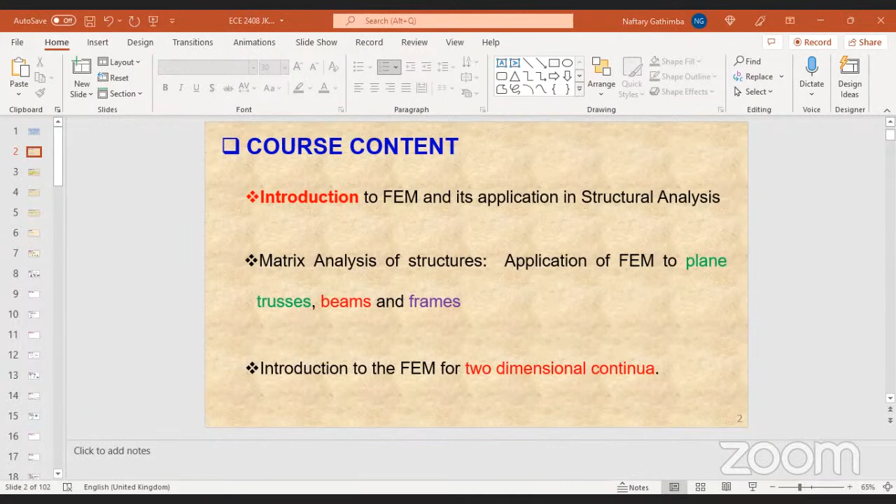All right. So this is the content of our course for today. And that being said, let me just go off the video. I was told last time that sometimes it hides some content, so we always continue improving. So allow me to just go off the video, and then I can make this full screen so that you can see clearly. Okay. So this is the content. Okay, sorry for that. Yeah, this is the content of our course.

So we're just going to have a short introduction to FEM, and this is theory. I like people understanding the theoretical part. Even if usually in structures the question will be calculations, we need people also to understand why we're doing this, what this is, right? So we are going to have a short introduction to finite element methods and how it's applied in structural analysis. Then we are going to go to calculations proper in matrix analysis of structures, where we are going to see application of this method in analyzing plane trusses.

We always start with a truss. I know you have heard trusses so many times, because a truss is a very simple structure for practice, for hand calculations. Usually when you start going to beams and frames, especially frames, you find manual calculation may become an uphill task. So usually, not always, you find many books, many texts, many lectures in analysis use a truss as an example for demonstration purposes.

Then, once we see the plane trusses, a kind of 1D structural element, we are going to see two-dimensional continua, and then go to solid elements, 3D. So we start with 1D, 2D, then 3D elements.

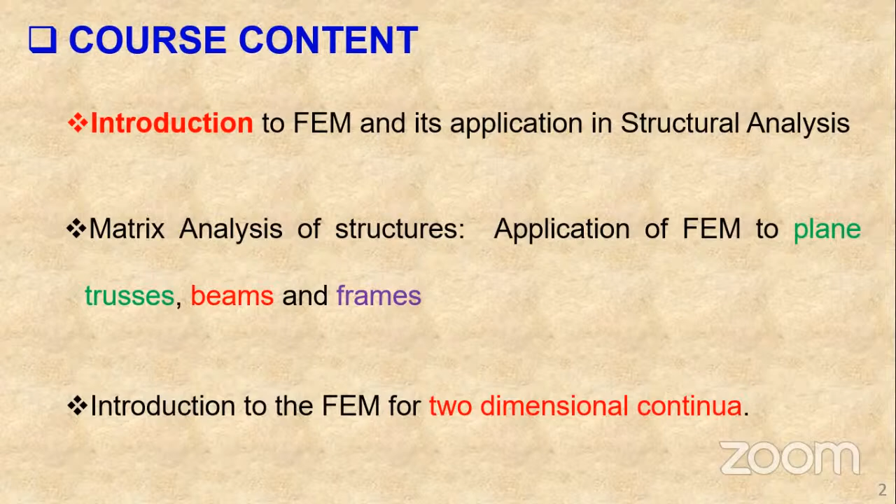So what is expected of you from this course? At the end of this course, you should be able to follow the standard procedures of the finite element method. The beauty about this method is that there are standard procedures. Even if the problem is humongous, a big structure like a multi-story building, the procedures are there. So the same procedures you follow for a simple structure are the same procedures you follow for that mega structure you're going to analyze using this method.

You should also be able to apply the finite element method to analyze trusses, beams, and frame structures manually. Get this right, manually. And then later on, we are going to adopt relevant software for analysis in the finite element method. Some design software employs the finite element method of structural analysis, and there is also software that is custom made for the finite element analysis of structures.

We are going to see a number of them like Abaqus, ADINA, ANSYS, right? But you're also going to see some design software, even as simple as Prokon. When you analyze a slab, they use the finite element method of analysis. But those are generally design software, not for finite element analysis, right? So you should be able to handle a few cases using the manual method, then we go to usage of software.

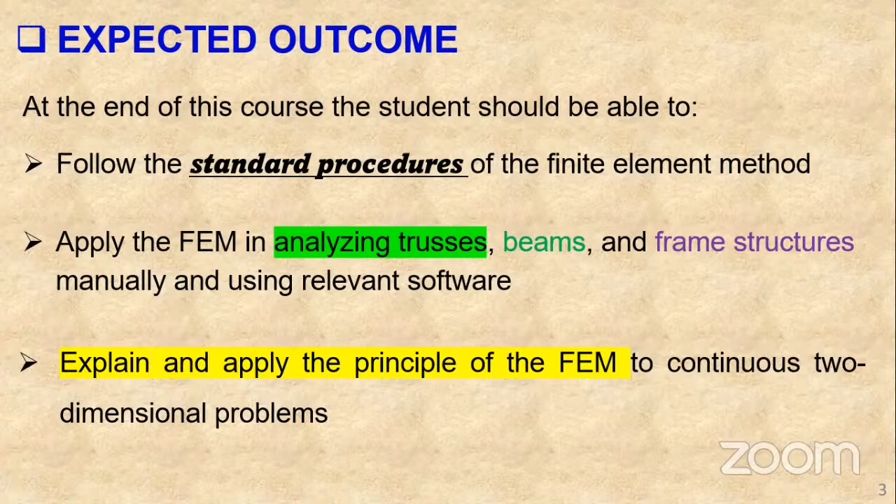Now, our methodology is as follows. We are going to have lectures blended weekly for 2 hours, maybe every week for 2 hours. And then, of course, I know there are 3 hours for tutorial. So in total per week, we have 5 hours of learning.

So what happens is that interaction with the lecturer, whether physical or virtual, is about 2 hours. You can go for 1.5 hours, you can go for 2.5 hours, based on the content that you're having for the day. The other 3 hours, which I believe for us is on Monday, you use it for your practicals because you're going to have computation or numerical analysis using softwares. And then you also use it for your assignment and tutorials.

And that's why in second part, you're having interactive tutorials. Usually I can issue a problem in class. I expect to have some people giving some possible solution in the next class. So usually when we leave and you have those questions, you discuss it amongst yourselves. And then if there is a challenge, that's where I can come in and help you work it out. But as I do so, you also need to see how much you have gone into it, how much you've been able to attempt the problem.

Finally, there'll be the laboratory work using the software. Of course, we may have other presentations from time to time, if we can have some specialists come and teach us on some of these softwares, because generally you don't know everything. There are many softwares for finite element analysis. Like now, I use Abaqus. We may get somebody else in the field who can use ANSYS and come and just show us the demonstration.

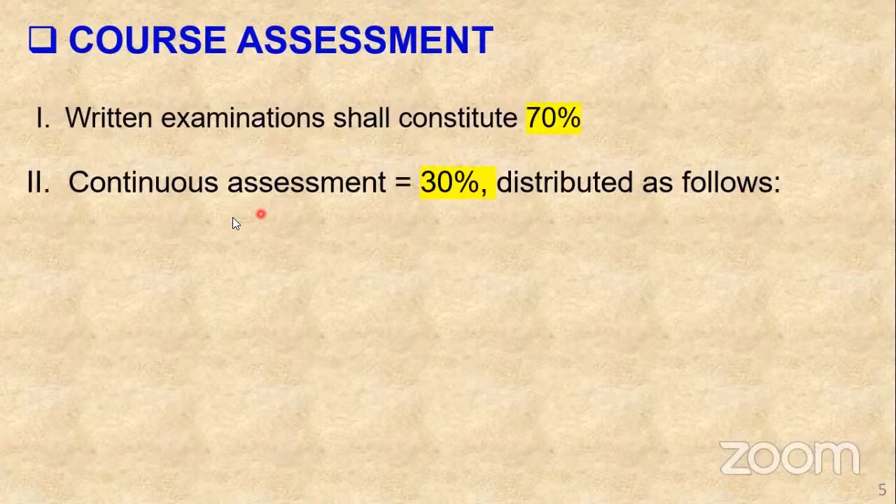This is how we assess the course. Of course, you know this. The first part is obvious. You know that exam constitutes 70%. The second one is also obvious, but look at the distribution clearly so that you put weight to each and every one of it. So you're seeing the pass mark is 40% for us, right?

And for our case here, sorry, something is happening with the chart. Huh?

So the CAT is 15%, and then we have the practicals 10%, assignments 5%.

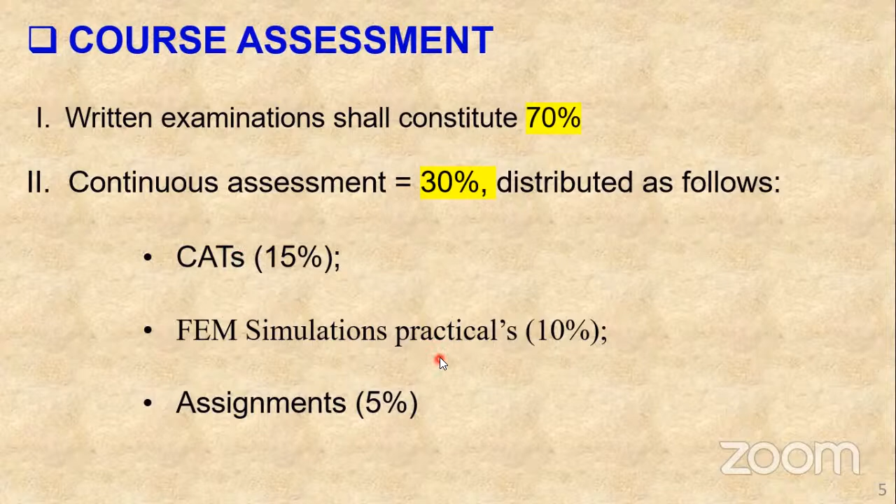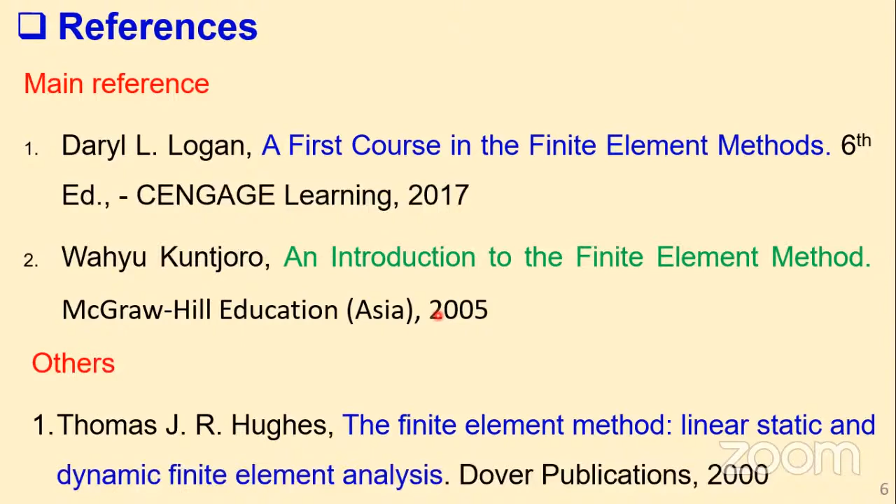These are our main reference textbooks. Of course, we should be able to get other materials. I was using these 3 years ago when I was preparing the content. Actually, this content was prepared in 2016, but we have been updating it as we go. But this topic, finite element method, is rather a new concept, and you find so much literature, so many people with interest in it. So it's very easy to get material for learning in this course.

So let's start with just understanding what is finite element method. Even before I get to what we have in our notes, I can give you an example. Let's have something like a circle. You have a circle like that. Then usually you have what we call the dimension, right? You are shown the diameter. Is it the diameter or the radius? Okay. So you can get the radius of this. So if this radius is given as r, we should be able to obtain, so this is given as r.

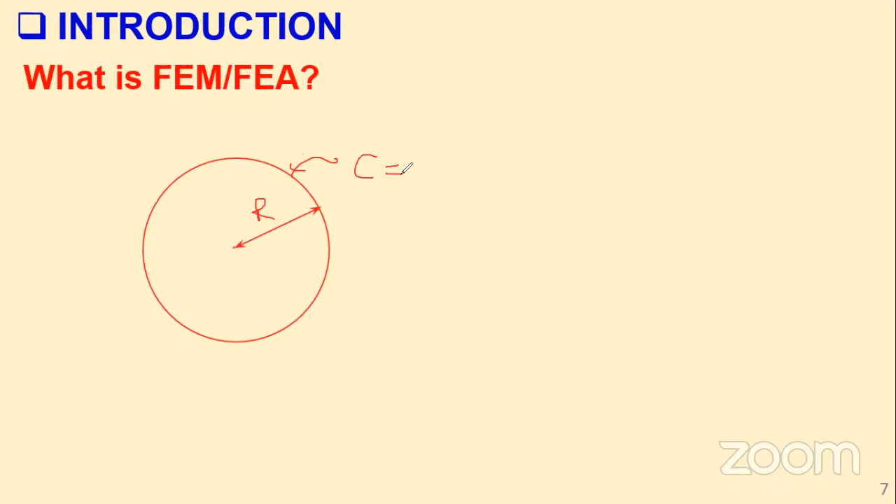You should be able to obtain what is the circumference. Circumference, which is 2 pi r or pi d, okay? Now, this formula is analytical, right? This formula in itself applies at any point. So at any point in this structure around this body, we are able to calculate the circumference.

This is a regular shape: a circle, rectangle, triangle. We have analytical formulas. These analytical formulas have been derived or obtained mathematically, like from first principles. Okay. Now, consider a case whereby we have something that still kind of resembles a circle. It's not a polygon, but you have something like this.

And then we want to calculate what is the circumference of this body. How do we go about it? Of course, even if it was a polygon, do you have a direct formula? Maybe not. So somebody may come and say, why don't we just approximate it as a rectangle, or as a square, or as a circle? Why don't we just approximate it as a circle?

Okay, maybe that's not from the center. We approximate it as a circle, maybe. Something like that. And then we get the radius, then we can get a value for the circumference of that circle. That is an approximation. It's not exact. Now what happens for the finite element method?

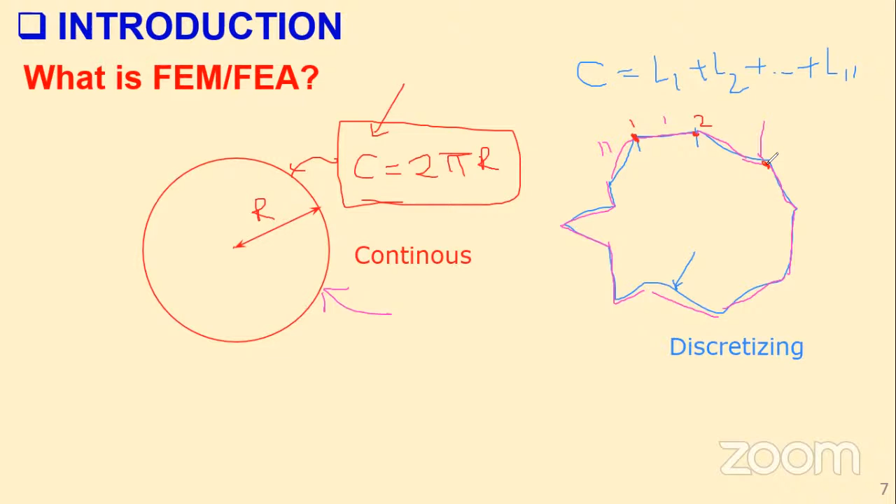So we have node 1 and node 2, which define element 1, running from node 1 to 2. Then, of course, we have another node. So nodes are points of intersection of different elements. So this is what constitutes finite element. A continuous structure, we discretize it or break it down. Once we break it down, we analyze a single element.

We break it down using finite, defined elements. And once we get this element, we are able to analyze this small body, like getting the length of this small body, which we call a finite element, element 1. Then for the overall structure, we need to assemble back, because once we break down, we take it separately. This is element 1. This is element 2. This is element 3.

Element 4, separate. Then whatever we wanted to determine, here the circumference, will be given by the lengths. To get the circumference of the whole body, we assemble. So it's a summation of the lengths, all the way from i equals 1 to 11. Okay, summation of those lengths Li.

So no matter what, even if we go now to our structure, if we wanted to know what is the deformation, we just need to break down our structure, and then we analyze for a single element what is the deformation or what is the stress in that element. Then we assemble for the whole structure. And now you can see why we are starting with 1D structural elements: it's easy to handle an element that is running in one direction or one dimension.

Because if it was a plate, if this body, remember I'm just talking of a circle which is open, this is a hollow circle. So if it was solid, then it means we would have to subdivide this body into so many elements, okay? And then we analyze for these different elements. So you can see the number of elements increase.

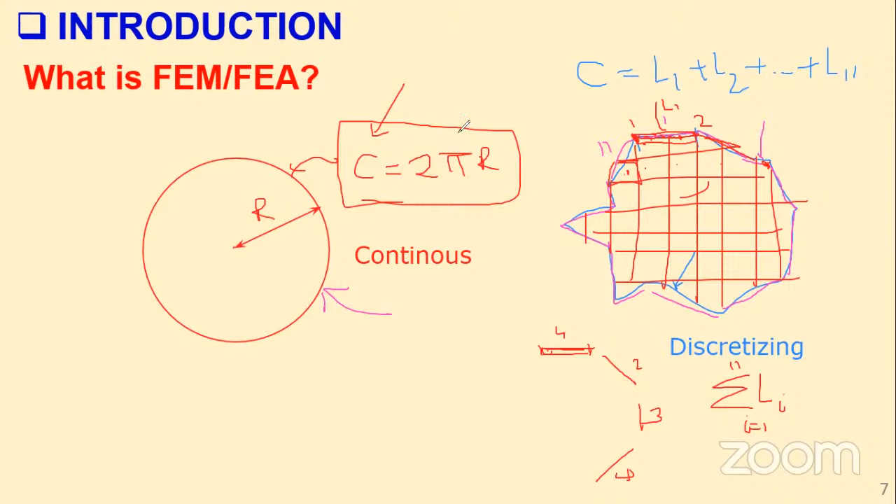So now we are having not one-dimensional elements which were aligned, but now we are having 2D elements. Then we analyze for each individual element. Then we can assemble back to obtain the behavior or the performance of the overall body. And this is what we call the finite element method. We do not use an analytical method, and we are going to see why an analytical method might not be applicable. We use a numerical analysis method.

Numerical, if you remember, I know you did numerical analysis. Numerical methods are approximation methods, like when you use the trapezoidal rule, Simpson's rule. I don't know, was the Runge-Kutta method there? I don't know. But I remember even in your tables you have the formulas for the trapezoidal rule.

So let's say we have a curve like that, and you want to get the area under the curve, then you subdivide it into different ordinates. So of course, what you are doing here is approximating, because we join these by straight lines. And then whatever you get is an approximate area under the curve. So this is a numerical method. Our finite element method is a numerical method. It's an approximation method.

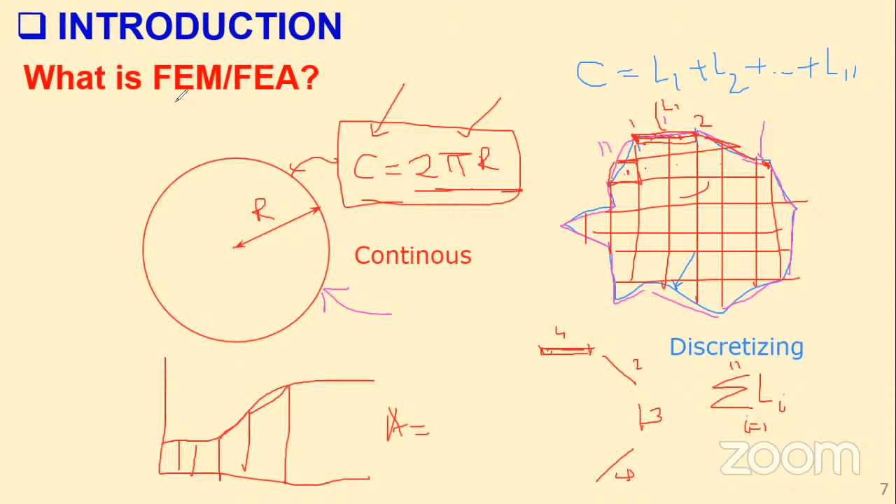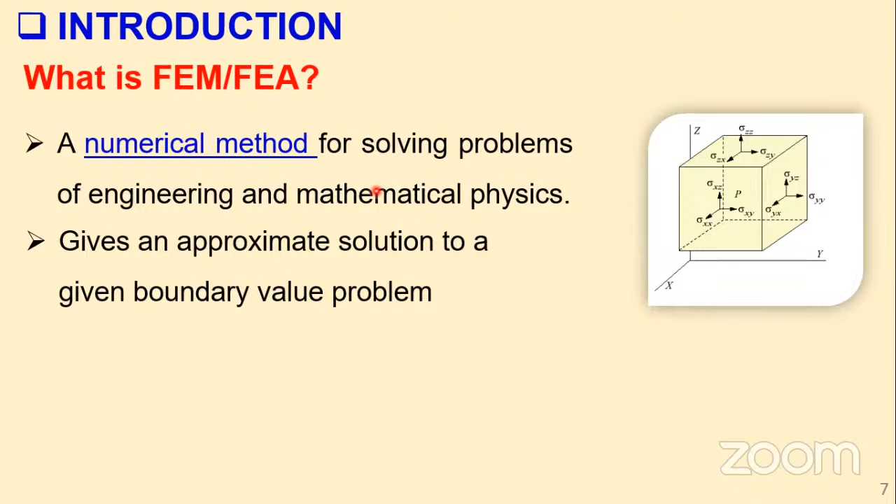That being said, and understanding where we are coming from, we can define the finite element method as a numerical method that we use to solve problems in engineering and mathematical physics. Of course, it gives an approximate solution to a given boundary value problem. Now, I know you might start running when we talk of the boundary value problem, but you're going to see what that is. Look at this body. I know you have seen it in strength of materials or mechanics, when you talked of the principal stresses in a small body in a structure. You extract a body, then you start analyzing the different stresses.

And these are principal stresses like sigma ZZ, sigma YY, sigma XX. This is a stress in direction Y. But we also have other stresses that are in other directions. To simplify what I'm saying for those people who maybe kept their books away and forgot after the holidays, what we are saying is, consider

you have done the concrete cube test, okay? So we apply a load here, and then we obtain this area. Let's say we are talking of a 15 centimeter by 15 centimeter by 15 centimeter cube. So you can get the strength of the block by just saying the load applied divided by the cross-sectional area, right?

But remember, once you advance, especially when you move to master's level and talk about advanced structural mechanics, you realize that as you apply this load, this concrete cube does not experience only compressive stress. It's also experiencing tension, because as you compress, the fibers are pulling apart here. And that's why you find failure by cracking, because it means there was tension occurring. So as you apply compressive stress, there are also other stresses experienced on the body.

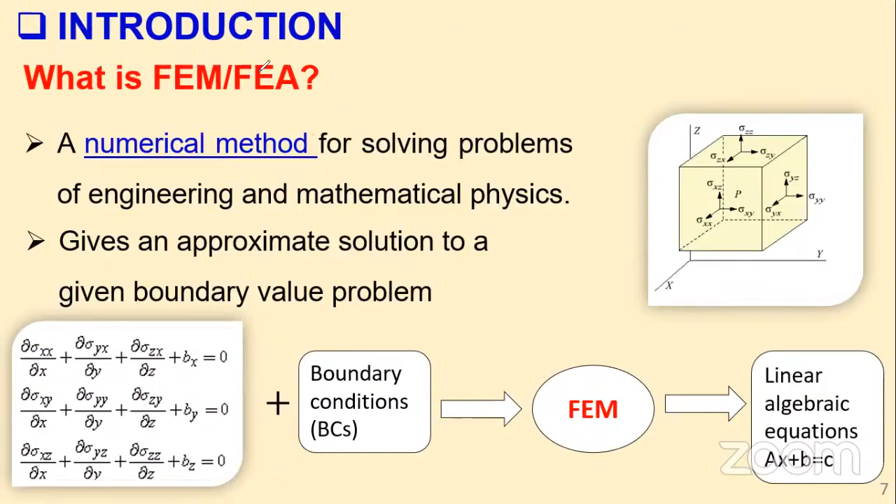Okay, good. Now, maybe before we move to FEM proper, let's get further understanding of this. Like, why do we need

Somebody disturbing us here? Don't worry about that. We always encounter this. Even when you go to Zoom, there was what we call Zoom bombing. That's why I'm always very careful with my Zoom. Anyway,

Why do we need FEM? You may ask yourself. One, we may have structures with complicated geometry. As we have seen, for a simple circular shape, we can just use analytical expressions to solve for whatever quantities we want to determine.

But if... I'm going to disable the chat area for a while, because I believe there is somebody out here to mess with us. So allow me for a while to deactivate the chat. I hope it will go. I just hope it doesn't take long. I will just continue. Okay. All right.

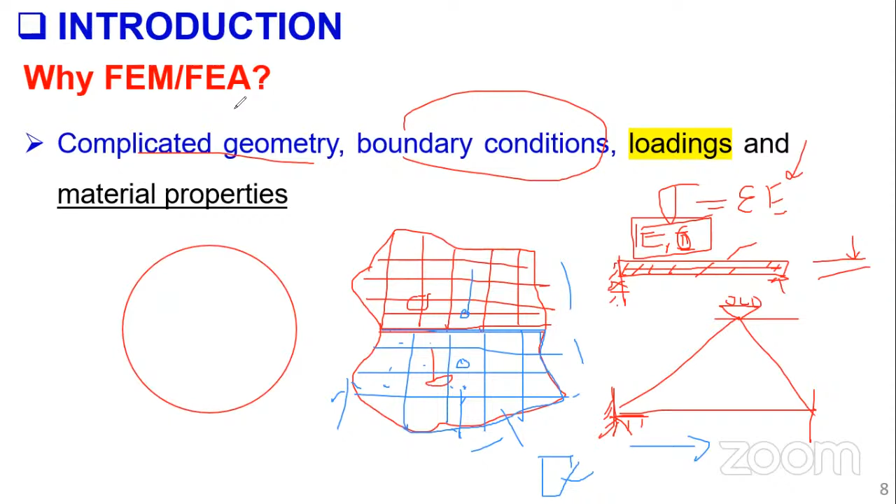So this is now why FEM comes into play, because of these four general cases: complicated geometry, boundary conditions, complicated loadings, and different material properties. So now you understand why we needed to introduce a different method. Why couldn't the others we have learned so far work, right?

Now let's move ahead and see these structures or shapes. They are regular, not complicated geometry. So basically for a circle, you have the formula for the area and the circumference. If it's a sphere, you have the formula for the area and the volume. Same case for a cube or a cuboid.

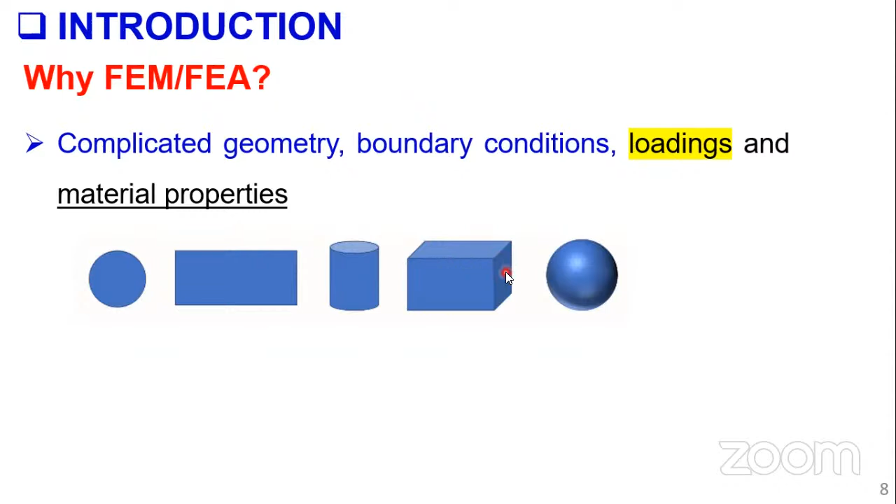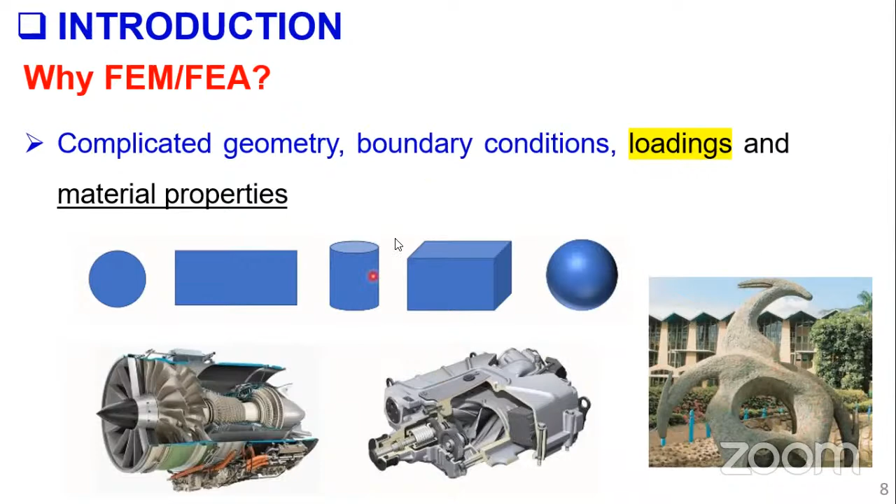So that's why finite element comes into play, because how do you model this using the normal methods you've encountered? Even if you model it in software, that software has to analyze it, because the geometry is changing, the boundary conditions may change, and they may use reinforced concrete on one side and bricks on the other. So the materials are varying. These are the cases where the finite element method comes in handy in analyzing these kinds of structures.

So if we try to compare the finite element method and the analytical method, since most of the methods you've been using were analytical, we see there are advantages and disadvantages of either method. One of these is the definition. For the analytical method, let's compare two items — we are comparing two oranges, because you can never compare an orange with bananas. So on this side we have the analytical method, and on this side we have the finite element method. Remember, we can say finite element method or finite element analysis — the same thing, FEM or FEA.

So for the analytical method, because we have a clearly defined expression, what you find is that we have a mathematical expression, and this expression will give us the correct or yield the value of a desired unknown, and it's valid at every location.

But for our finite element method, because we said it's an approximation method, let me go back to our circle here so you understand the statement I want to make. So we said if we have a body like this, irregular, composed of different elements, and we are trying to approximate this circle, for instance, you find it meets the circle only at the nodes. So the exact solution will only be exact at the nodes, but anywhere else it's just an approximation.

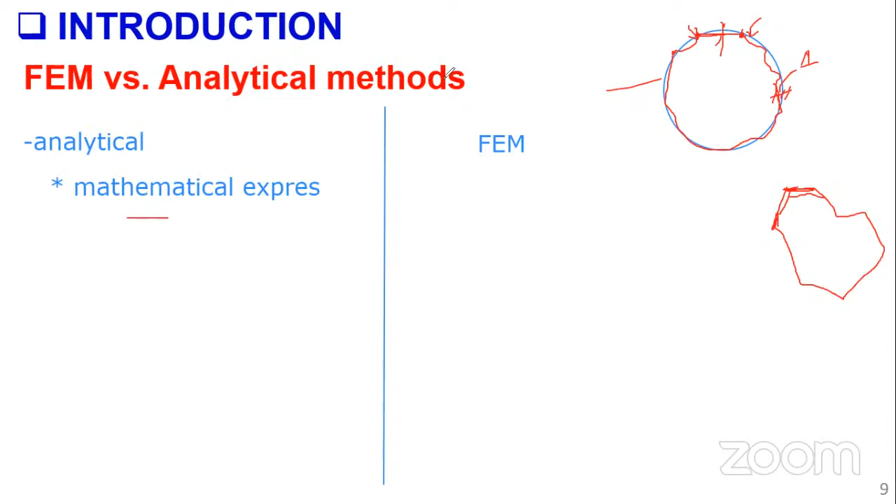So of course, we know the FEA is an approximate method. The answers or the solution that we get are approximate. So how to improve the accuracy of the approximation is by refining the element size, because the bigger the element size you use, the more the divergence of the results from the actual solution.

Of course, there are many applications of finite element method, like mechanical engineering, structural engineering, fluid flow, heat transfer, electromagnetic field, soil mechanics, acoustics. But for us, we are going to dwell with this because, of course, we are in civil engineering, structural engineering.

We are going to dwell with static and dynamic, and linear, non-linear cases. But first we start with static cases in structural analysis. So, of course, you may get some textbooks that are difficult for your understanding because maybe they are tailored towards people in mechanical engineering who are interested in heat flow, or maybe in electrical engineering, who might be interested in the issue of electromagnetic field.

But for our case here, when we stick with structural analysis, now we narrow down. Now when you go to look for this literature, it will be interesting to look at different books and see, oh, this one maybe not very good for my use in structural analysis, so let me go for this particular case.

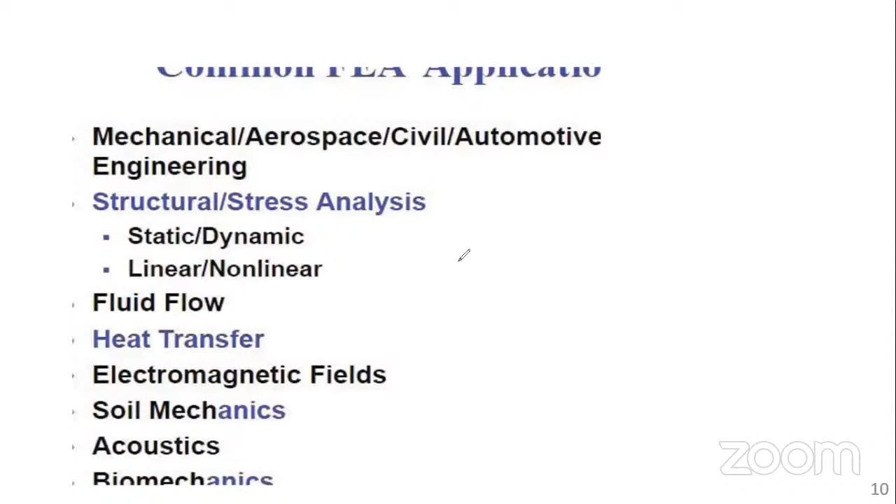So what I said is that we have narrowed down to what we employ in structural analysis. This is where we are going to concentrate our work on.

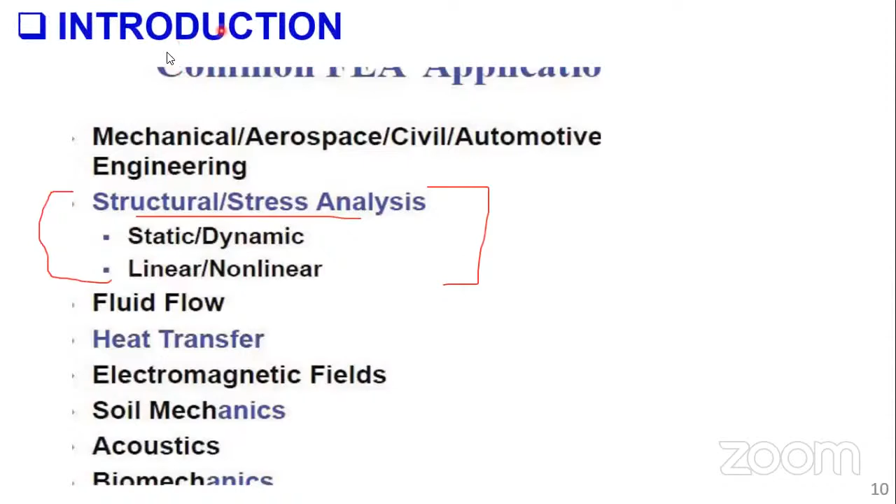So what are the advantages of the FEM method of structural analysis? Of course, these are quite clear from what we have said. Our method can be able to handle irregular shaped bodies quite easily. You can enumerate this: it can handle irregular geometry very easily.

Then we can also handle general load conditions without difficulty, so any load condition can be handled by our method. Then, of course, if the material is composed of several different materials, because for the element, we use equations and evaluate them individually, we can also handle different kinds of boundary conditions, so you are not now afraid of the boundary condition.

Again, we can include the dynamic effects. I know you may have been studying static analysis, but it's good to understand that we also look at the dynamic effects for our structural analysis. We can do those easily in finite element method.

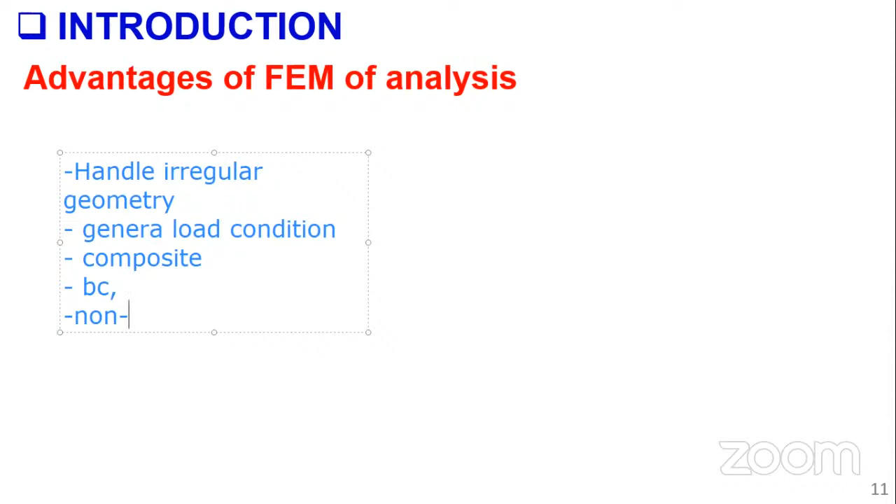And we can also handle nonlinear behavior. Most of the analysis you have been doing were linear, restraining yourself within the elastic range where Hooke's law applies. But for this method now, we can go to nonlinear behavior of a structure. So you can see the advantage of this method over what you have already handled in previous courses.

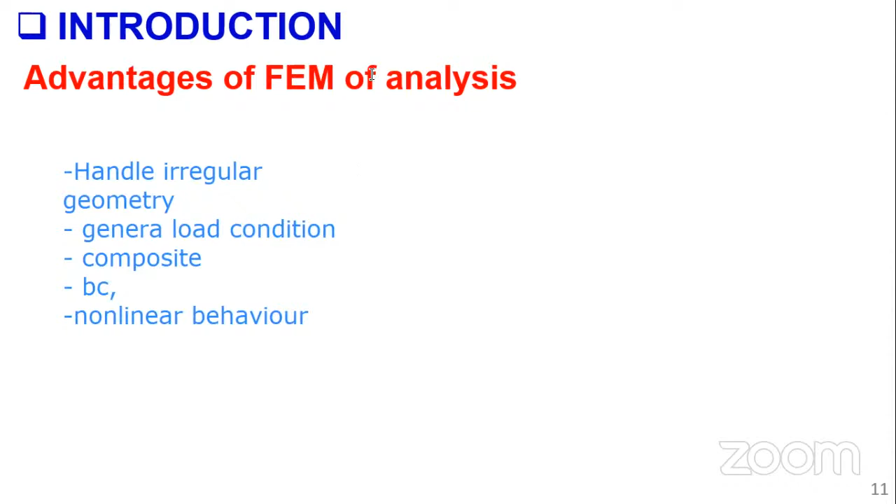So what's the basic concept of a finite element? The basic concept is that you take a complex body, a complex object, then through breaking it down or discretizing, you create separate simple elements that you can do simple analysis on. So basically in the real world we have a complex body, which we simplify using a physical model.

Then those physical models, which we now discretize, will be small finite elements connected at nodes. And then for those finite elements, we use mathematical models, very simple algebraic equations to analyze those simple finite elements.

And then we have what we call the meshing, the mesh model. The overall body, when you bring it back, will have been subdivided into many elements. So in this case, let's talk of a body which is not 1D, let's say this is a plate. Ignoring the thickness, it means we have subdivided this body into many finite elements.

Maybe we want to analyze the deformation of this plate at the center midpoint, in this case it could be a slab. So at this point, if you look at it, it looks like a mesh. So discretizing and subdividing our body, when you bring the different elements back together, we talk of meshing. You're going to get this term in many codes: meshing.

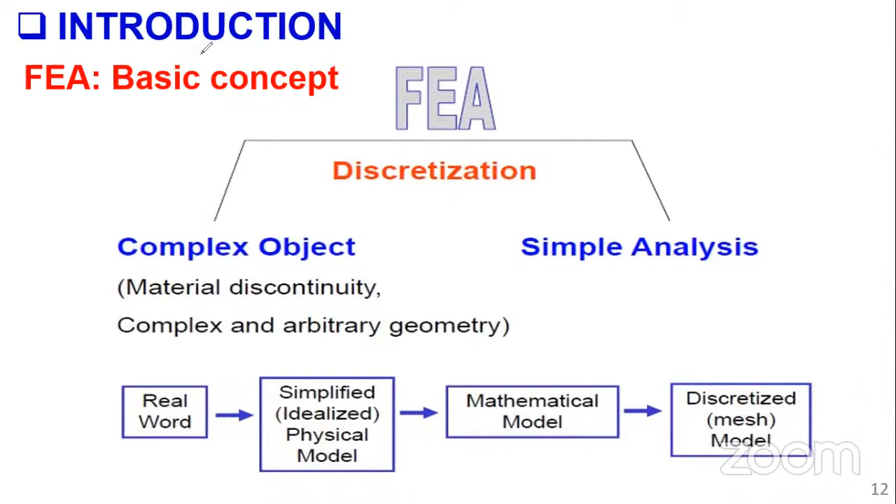All right. There's somewhere I wanted us to stop today, or maybe we can just finish this small part for theory, so that next time we're doing the calculation. This is an illustration of the basic concept of finite element analysis. We have our body here. We divide it in smaller pieces, which we call elements, which we said is meshing.

These elements are joined together at the nodes, where the elements come into contact. Now, you have meshed, then you break it down, what we refer to as discretizing. The continuous body, you make it discrete, so that you are dealing with an individual element. Then you perform element-wise calculation, analysis per element.

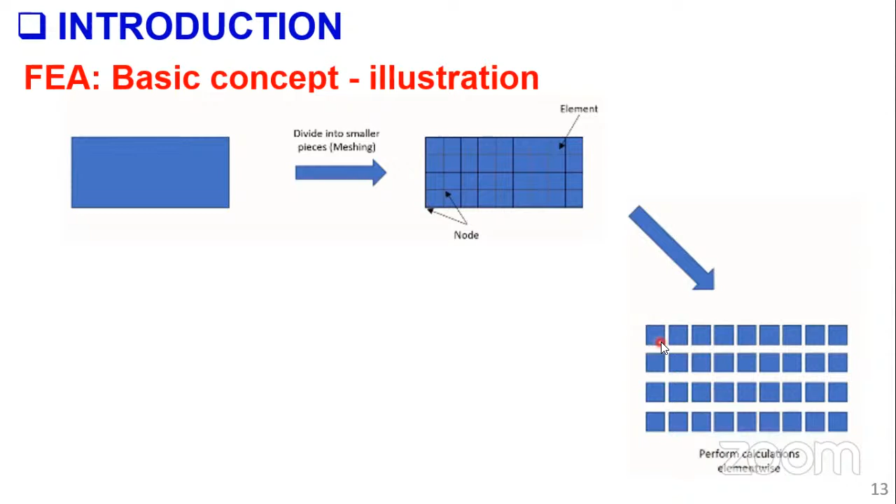Then we assemble together. Once you have done the analysis for the single element, you can assemble together and recoup your quantities, for example deformation at the nodes for the entire domain. Because you already obtained the deformation for individual elements, you assemble together and derive it for the overall structure.

You might have seen this in a textbook, papers, or software, where people do analysis and present their results in terms of contours like this. Behind the workings, this is what's happening in the software. You define the mesh yourself, but the calculation and assembly is done by the software at the back, and then you're able to visualize the results like this.

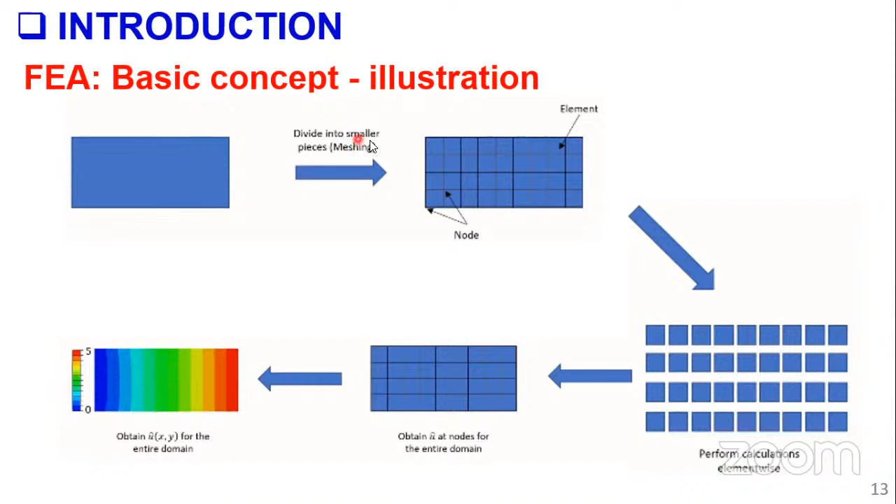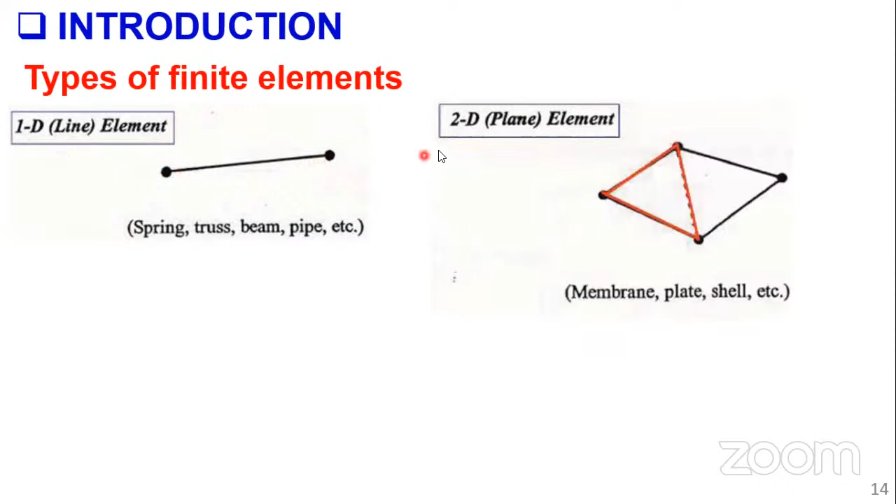We have different types of finite elements, which we can categorize into three categories. One is the 1D line element. It's just one direction, no depth, no width, just one line. We use it to analyze springs, trusses, beams, pipes, etc. Once we understand the 1D element, we move on to 2D. With 1D, you need to be cognizant of the Cartesian plane: the x, y and z directions. You can interchange y and z.

So here we are only concerned with one direction, like for a truss. A truss member we simplify as a pin-jointed frame, which can only carry axial loading, either compression or tension. Then we move to 2D, where we have introduced another coordinate, x and y. In this case we may talk of plates, shells, membranes. Why are we not talking of the slab? A slab is represented by the plate, but the plate's thickness is small. For a slab, the thickness becomes significant.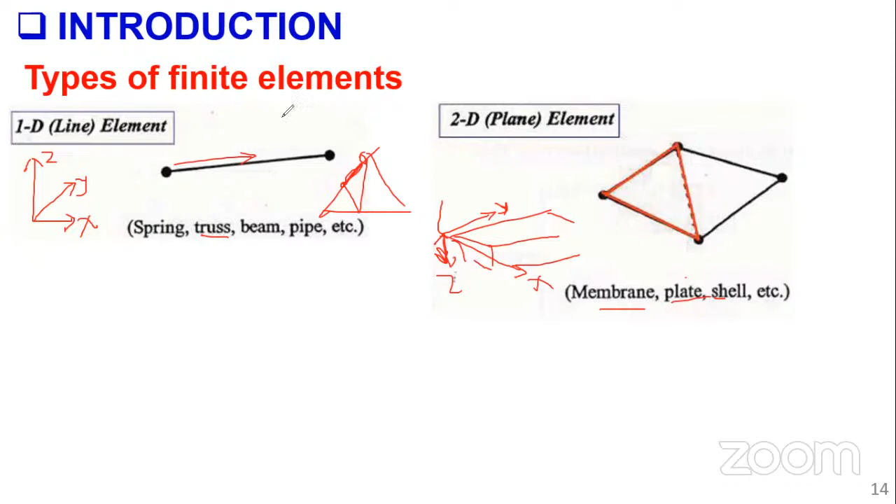So for this one now, the thickness here has to be considered by another coordinate. So the length is considered by one coordinate, let's say the x, and this length is considered by another. This could be X, this could be Y, and then the Z direction could be the thickness. I hope you get it here. So when we have that direction, the thickness becomes important. That's when we have to introduce the third, 3D solid element.

What you have to realize in the finite element method, for us to be able to assemble together what we had already separated, is that we have to assume that the nodes remain connected even after deformation, so that this node will remain connected even after we apply the load. Because there is the load application stage, then there is the analysis of individual elements, and then there's assembly, so that we can analyze the whole structure.

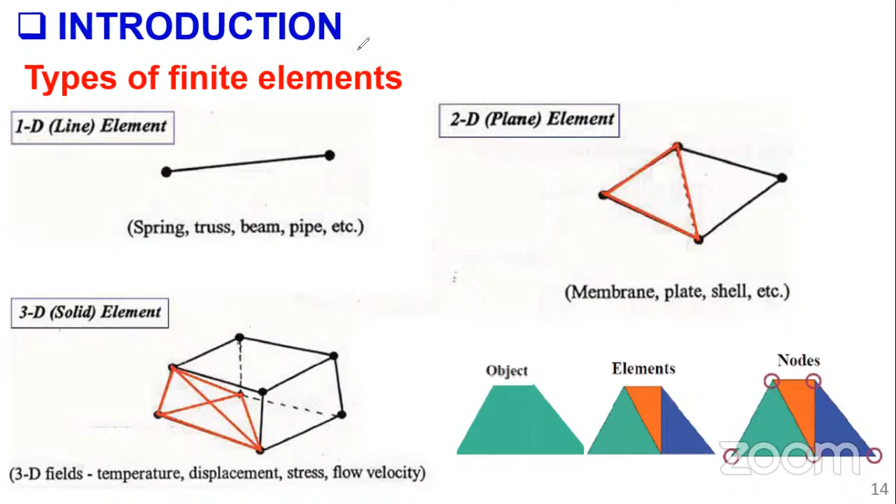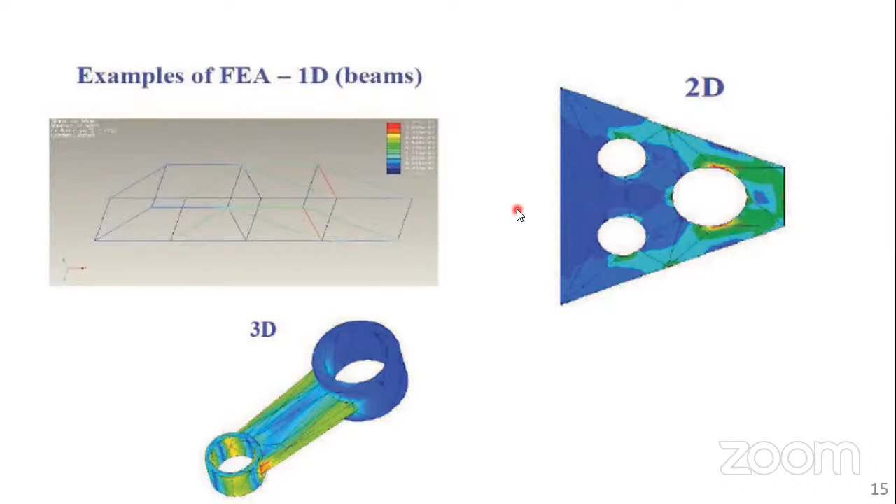Now, how do we generate our FEM equations? There are two ways that we generate the equations. One of them we call the direct stiffness method, and the other one we talk of the variational methods. But for us, we stick with the direct stiffness method.

It has been shown that, for computation purposes, the direct stiffness method is more desirable because formulating the equation is simpler for most of our structural analysis problems. So in structural analysis, we are saying we have two approaches that we can use. So we have the direct approaches to formulate our equations.

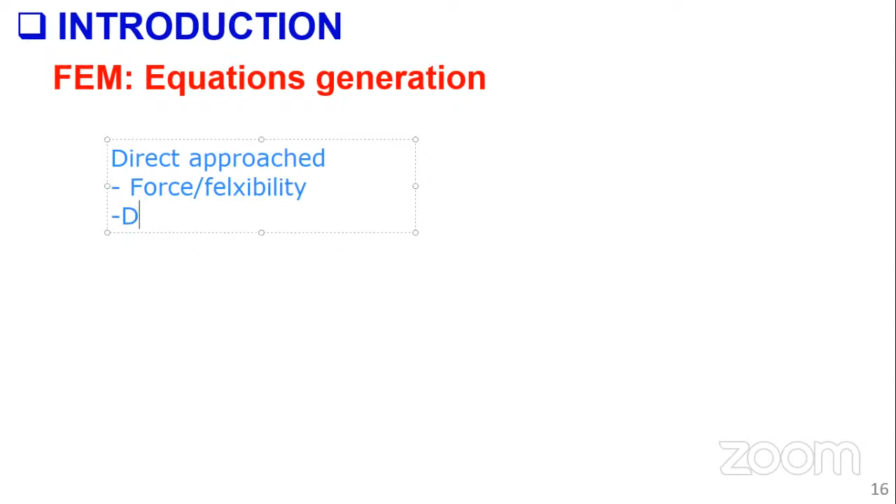And in direct approaches, we have two methods. We have the force or flexibility method. And then we have the displacement or the stiffness method.

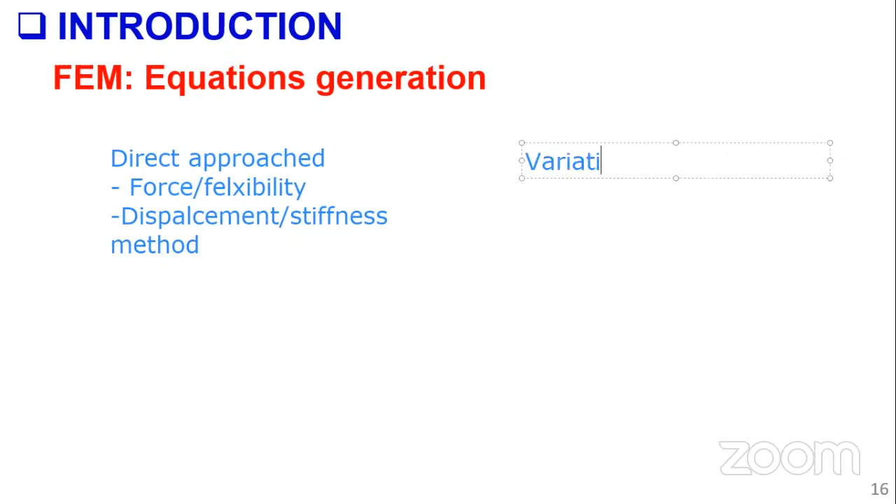I was saying there is another method that you could also use, which is called the variational method. The variational method is usually employed for both structural and non-structural problems. But these direct methods or approaches are preferred for structural analysis.

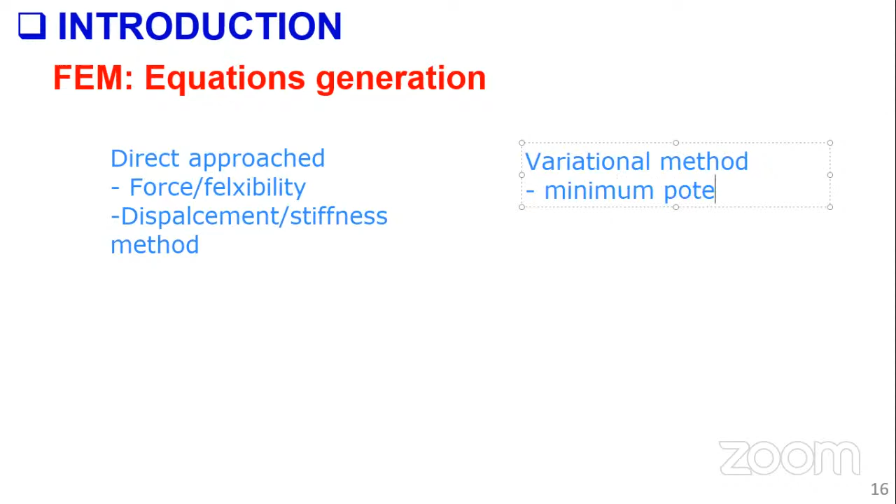And in the variational method, we can use what you call the minimum potential energy method, or principle, we talk of energy principle. And of course, we also have the principle of virtual work. Okay.

For our case, because, as I repeat, this is an introduction, we concentrate on this approach, the direct stiffness approach. And because there are two of them, we stick with this displacement method that has been shown to be quite applicable or quite useful for structural analysis problems.

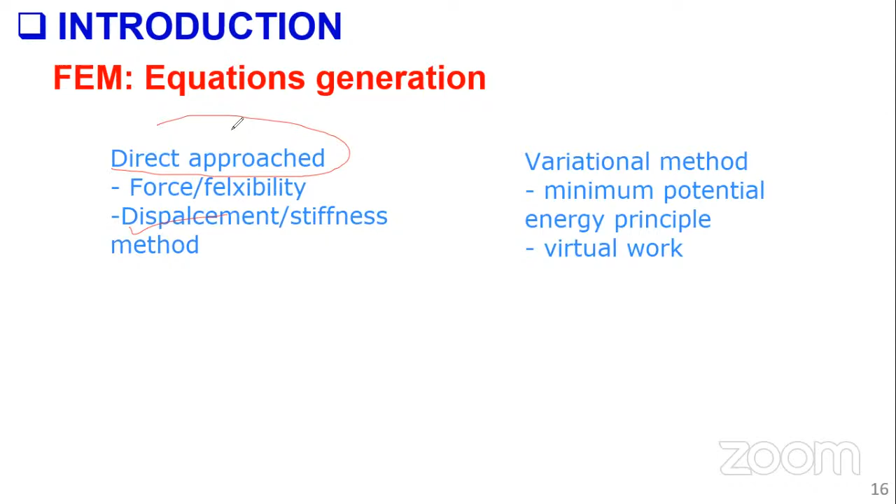Just to mention what is happening here and why do we need the equation. We said our complex problem or our analytical problem was constituted of partial or ordinary differential equations. Then if we introduce a boundary condition, we can employ the finite element method to simplify our structure into a simple algebraic equation of the form ax plus b equals c. So these are the typical equations that we use for the finite element method. So the issue is, how do we generate these equations?

These two approaches: force, and the displacement or the direct stiffness method. For the first method, we assume that the internal forces are unknown. But for the displacement method, we assume the internal displacement u as unknown. Okay. For our case here, we can use both of them, but we said we stick with one method here. Of course, you can read further on this.

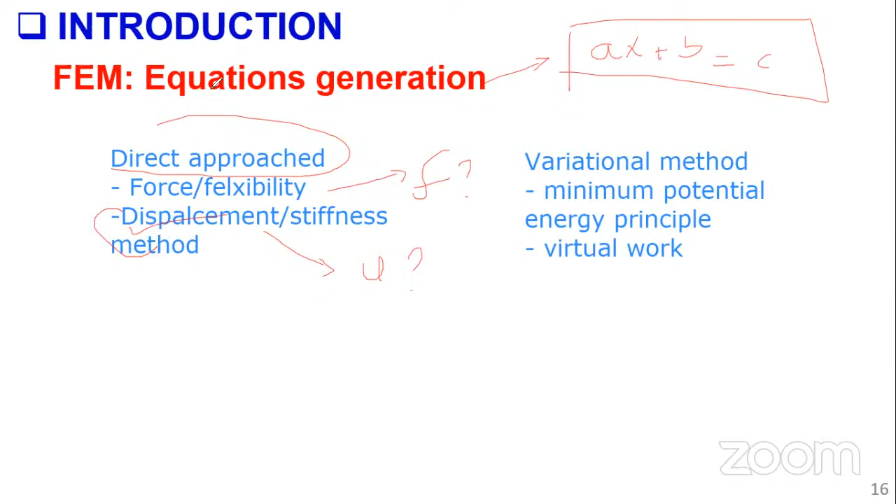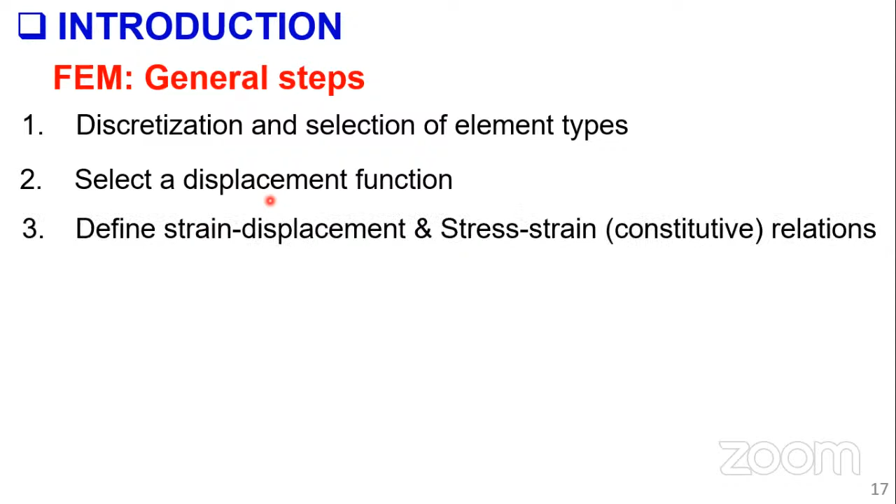But if we stick with our direct stiffness method, we look at the stages of generating equations for clear understanding. The general steps: one, you discretize and select the element types that you want to use. Two, you select the displacement function. Three, you define strain-displacement and stress-strain constitutive relations.

Four, you derive the elemental stiffness matrix. Five, you assemble and introduce boundary conditions. Solve for unknown degrees of freedom. Solve for elemental stresses and strains, and interpret your results. And this is what I said: the finite element method has got general steps and procedures, no matter how complex the problem is. They are the procedures that you can follow.

Now, let's go through this one by one for simple understanding. So we have our structure. I know you have these points noted somewhere. So let's start with our body, just a typical body. I'm using a general shape before we start sticking with our regular shapes that you're used to, the truss, the beam, and so on.

So the first thing is to discretize. If you know you're going to use the finite element method, discretize. I've chosen to use the 2D one because we are going to see elements that have more than one coordinate system. So you subdivide this body into different elements. That's the first stage. Once you do this, you must decide on the type of element. What element do I need to use?

Remember, we have talked of 1D elements, 2D elements, and 3D elements. Of course, if this is a plate, then I know I'm going to use a 2D element. Later on, we are going to see that 3D elements, which we call solid elements, have different categorizations depending on the order of the polynomial. We are going to understand the interpolation that we are doing, and how to employ the polynomials and the order of the polynomial.

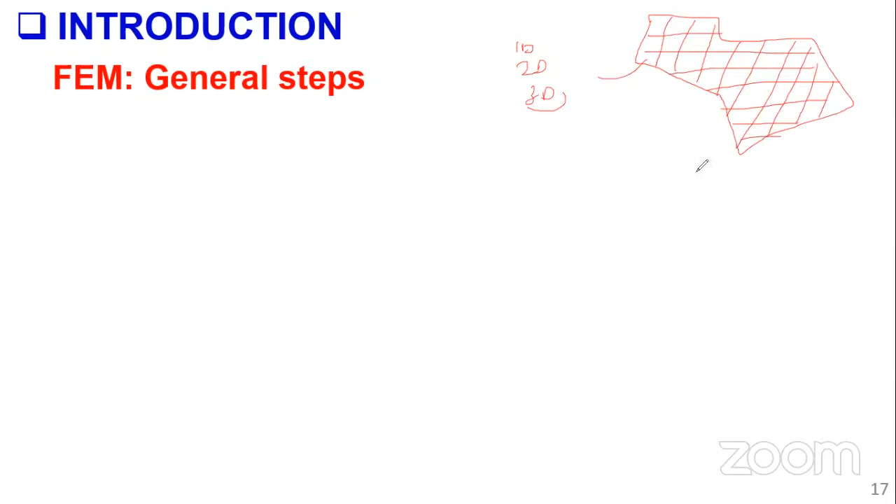But for right now, if I was talking of a truss, let this just be a typical truss. Okay, this is just a truss, normal truss. So it means there should be a straight line. It means if I discretize by subdividing, I say this is node 1, this is node 2, this is node 3, and this is a truss. So this is a single line, 1D, then I know I'm using 1D element.

Number 2 is to select a displacement function. Let me mention at this stage that finite element method using direct stiffness method, we are saying we assume displacement as unknown and force as known. We employ this expression: F is equals to K times D. Now, with this, for direct stiffness method, we assume this as the unknown.

And then we assume the forces are known, like we will be given the force applied here is 2 kilonewton. So we are to calculate the displacement. Let's say this is a truss, we know the forces acting on that truss. Maybe this is a support here, this is a support here. Maybe you are required to get what is the displacement at that node.

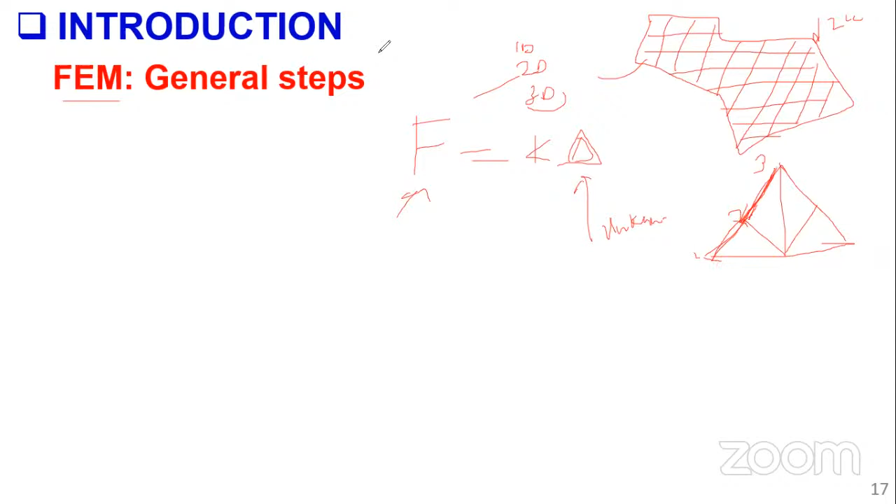Now, with that understanding, let me get this page. So you have handled the first stage. Let me get the truss. So you have handled this, discretized, and you have selected the element type.

Number 2, to get the displacement function, if we consider a single bar like that, or even a beam, and this is a load applied here, which is known, P, this is fixed, then because of the applied load, the typical deformation will be like this for a cantilever. So this is the total displacement delta, or you can call it U. But let's say we want to know the displacement at this point. And the length here is L.

And the length up to any point that we want to talk of, because it's direction X, we have to show the axis, this direction X. So at any point X, we can define the displacement at any point X will be dependent on the value X, or you may say X over L times something.

So we have to select a displacement function because finite element method is an interpolation method. Because if we subdivide our structure into elements, element 1, element 2, element 3, element 4, we said the exact values will only be at the nodes 1, 2, 3.

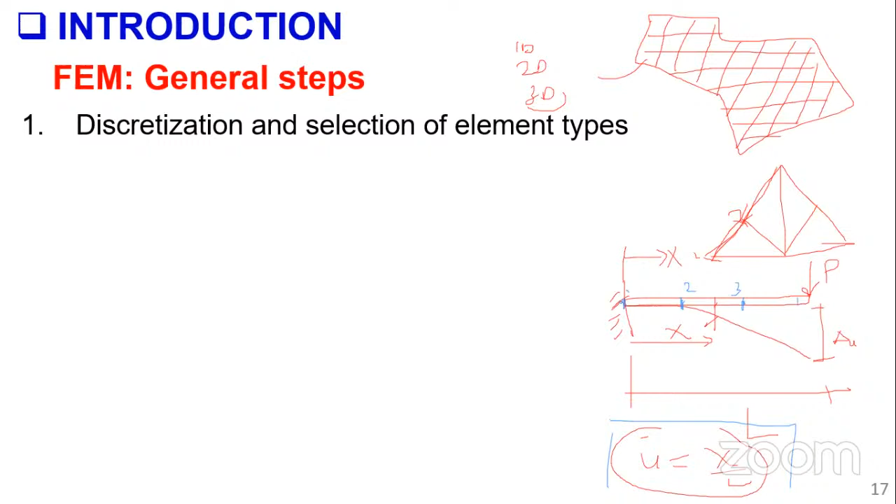Know that finite element method, direct stiffness method, we are employing this equation: F is equals to, Hooke's law, K times U. Let's now start sticking with U because we are going to use displacement as U. It's just a matter of notation. K times U. So you see, this is unknown. We need to get the expression, typical variation, how it's varying across the member.

Now we start analyzing for individual element. K, of course, is the stiffness. So we are going to obtain the stiffness for different members. I said stiffness encompasses both the material properties, either the Young's modulus or the Poisson's ratio, and also the geometry, which may be given by the section modulus or the moment of inertia, and so on.

Okay. Now, so we have handled the stage 2 of selecting a displacement function. We are going to see this using calculation. It's quite easy, but at this stage, I just wanted you to just have a feel of the procedures or the method that we are following step by step.

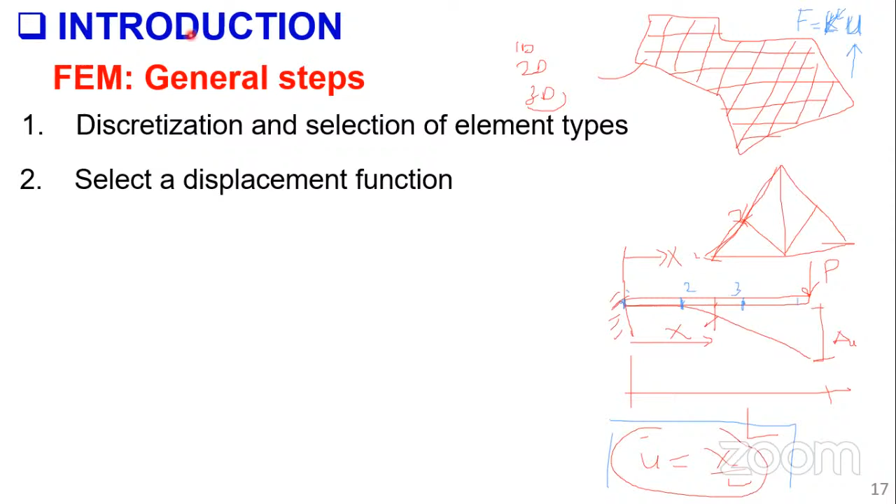So the third step is now you define the strain displacement relationship and the stress strain relationship. The stress strain relationship is material characteristic, what we call the constitutive behavior. Okay. So in this case, we already know that strain is equal to change in elongation or change in deformation; it is a ratio. So basically we know strain. First, we are defining, let me just get it here, the strain displacement relationship.

So this one we know from physics that if you want to get strain, it's change in length over the original length. And if you want to write it as a differential equation, it is change in U over dx as a derivative, yeah? du over dx. Okay, that's a strain. Then the stress, of course, we know stress is equal to strain times the Young's modulus.

So you can see from this stage, we have the strain, which is here, which is expressed in terms of deformation, du, and already we have defined in step 2 a displacement function. So you can see you can be able to work it out and express stress in terms of displacement.

Now, step 4, we derive the element stiffness matrix and equation. Because you see, we have this equation, the guiding equation for finite element method: force, stiffness, displacement. And we say the force is known, displacement is unknown, K, stiffness, is known and has to be computed. And we refer to it as the stiffness. And now it's going to come into play as a stiffness matrix. It will be in matrix form.

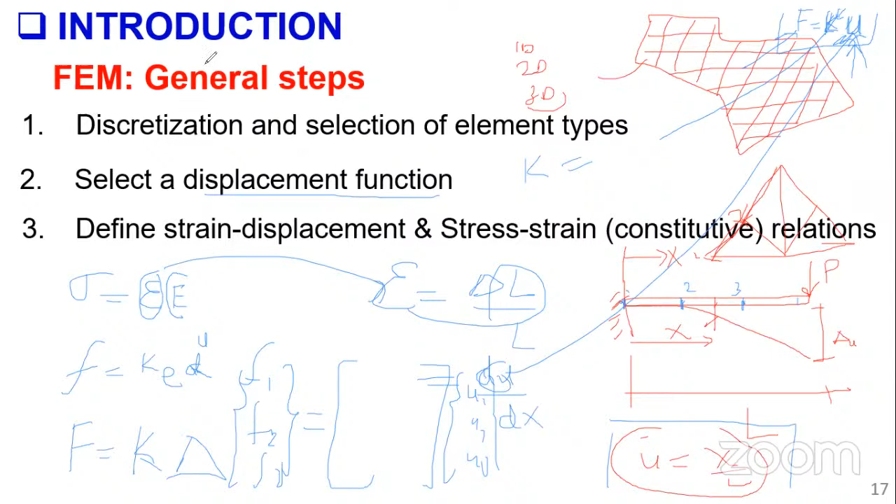So once we get it for an element, then we can assemble. We come to the assembly stage. So we have obtained the elemental stiffness matrix. So we assemble, and then we introduce the boundary condition. Okay, we are going to see how the boundary condition helps us. There is something we call the singularity of a stiffness matrix, in a way that a matrix doesn't have a determinant. It's not invertible. But when you introduce the boundary condition, then we remove that singularity.

So that's why at the end of this course, I'm going to direct you on some revisiting that you need to do in mathematics, especially on matrices, to understand matrix operations, because you're going to be dealing with matrices for quite a while.

So once you assemble your finite element equations for the global, we get assembly. Remember we said we obtain the elemental stiffness for each of these, then we assemble. So we get the overall: F equals capital K times D, right?

So for our case here, when we do that, you realize we are going to get what we call the elemental stiffness matrix and the global, the capital K. This is the stiffness matrix for the overall structure. So it might end up being very large, not even fitting in your book if the structure has got many degrees of freedom.

That is the general steps that we follow, because after this, once you've been able to assemble and introduce the boundary condition, you just need to solve for unknown degrees of freedom. To solve this, you are solving a set of algebraic equations, and you can use a number of methods to solve algebraic equations using matrix methods.

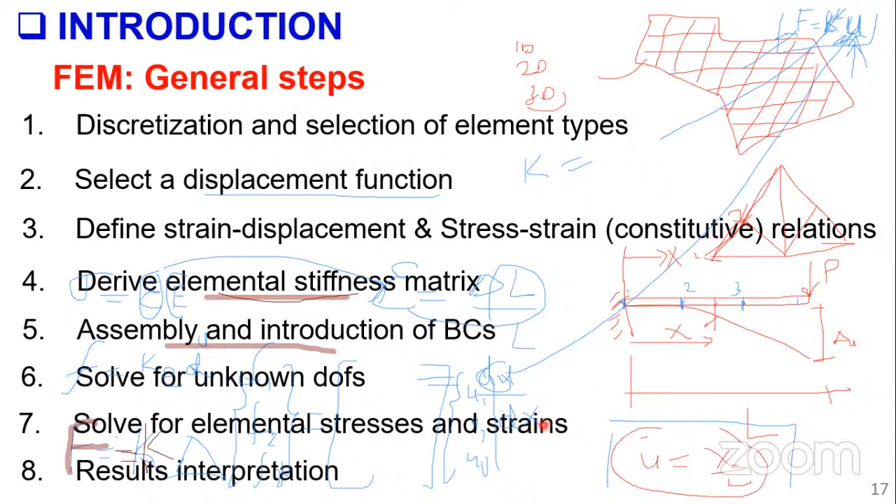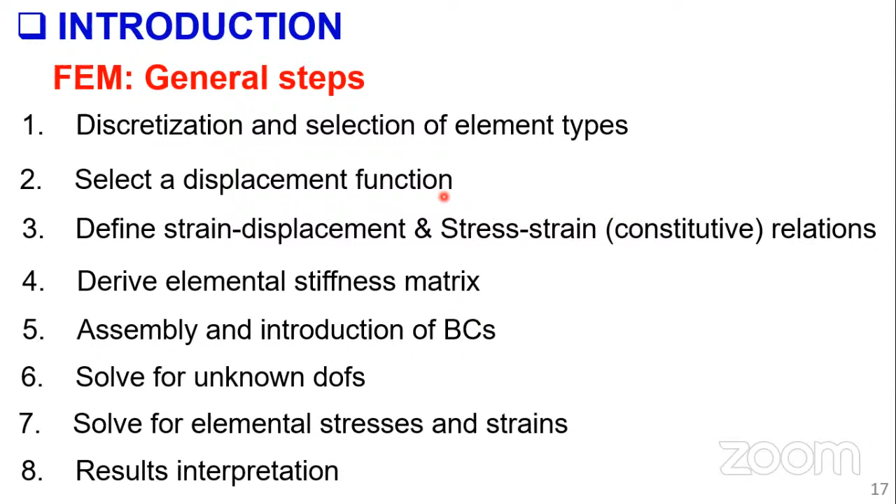And of course, interpreting your results always. I hope I've been able to elaborate these steps, the general way that we follow, so that when we start doing the proper calculations, it will be very easy or quite understandable for each one of us to know what we are doing.

So I'd like to add a short exercise. This is not to hand in, but for you to visit.

You need to revisit how to handle matrices. Like when you talk of a null matrix, unity matrix, identity matrix, so on, you need to know what these matrices are. When you talk of matrix operations, you should be able to be quick and fast, to know how to add, subtract, divide, multiply, transpose, and get the inverse of the matrix.

You should be able to get the determinant of a matrix, because when you are solving simultaneous equations using matrix methods, you need to get the determinant. And we are not just talking of 2 by 2, maybe up to 3 by 3 for hand calculation. And of course you should now learn, or remind yourself, since you learned this in first year, how to solve simultaneous equations by matrix method, so on and so forth.

If you look in your notes, I believe either reference number 1 or 2, I can share this note or this book with you. There is a book, I think the first one, which has got a reference, an appendix, full of a summary of how to solve these matrices. So you can go through it quickly and remind yourself.

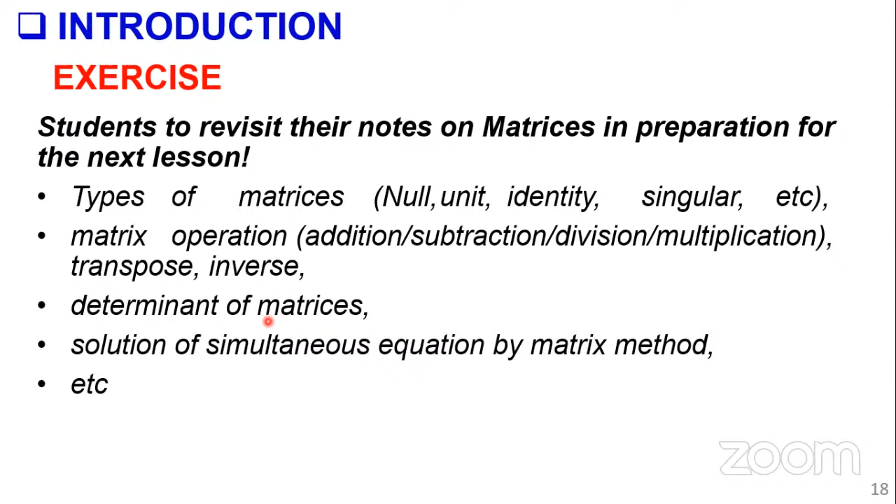Another exercise you need to do: in this course we are going to use Abaqus as software for learning, and the student version is available for free. The commercial version, I believe, may cost over a million dollars or thereabout, but I have it because of the institution. So we are going to use the student version so we can all be on the same platform. I don't want students going to crack software, so I don't condone that. So you install the Abaqus student version on your laptop, or you can use the department computer laboratory.

In the class labs, I have shared with you the assignment, the second part, actually the first part. The question, or the figure being referred to, is available in the documentation. So it means you have to install the software as soon as possible.

So that's the introductory part of this course. Next week we shall be looking at the matrix analysis of structures, so we'll be doing proper calculations now. That's why I would like to urge you, before then, it's good you be acquainted or refresh your memory with the matrix analysis of structures, the part that I have suggested.

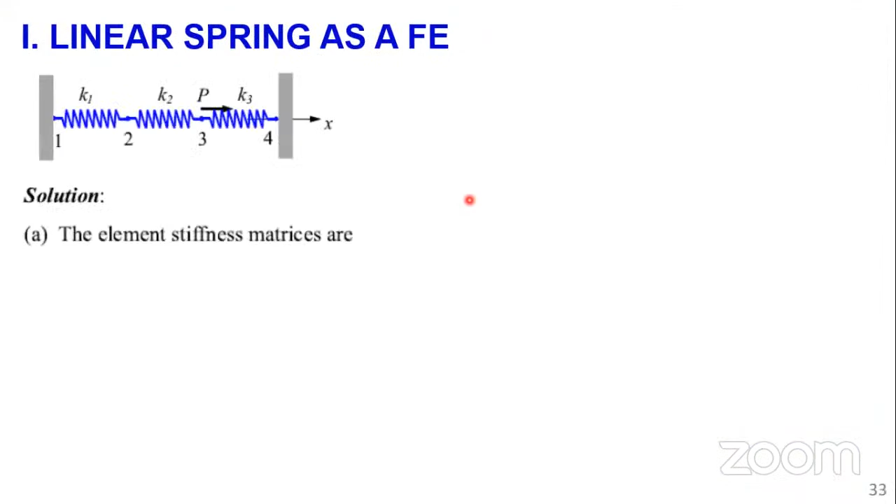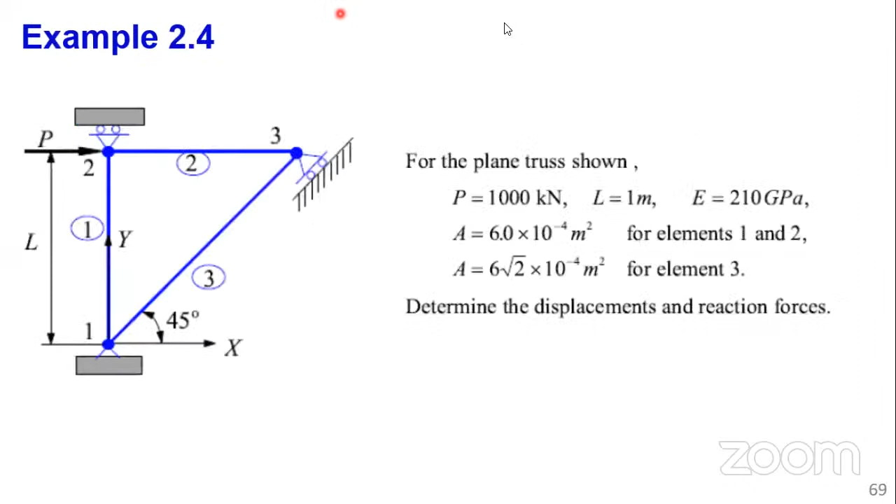At this stage now, I'm looking at the chat area to see whether there's any question somebody may want to ask. Because I want to end, we have about 4 minutes, and I want to release you to go to the other class. But I would like to do so before giving you a chance to ask a question, if any one of you has a question they would like to ask live.